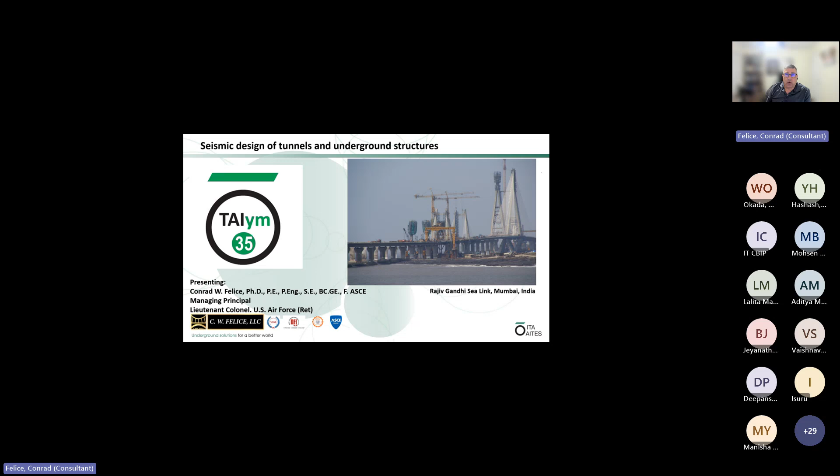We've got some very good folks to give you some background on seismic design. I'll give a basic overview and introduction, and then I'll turn it over to Youssef, who will go into some of the details on the seismic design that we're currently applying. Then we've got a project description where these tools have been applied, and then some risk issues that Mohsen will be presenting, and then we'll be available for questions. My outline is to address some of the worldwide seismicity issues, some of the vulnerabilities, then some specific hazards, and close with some background on our working group.

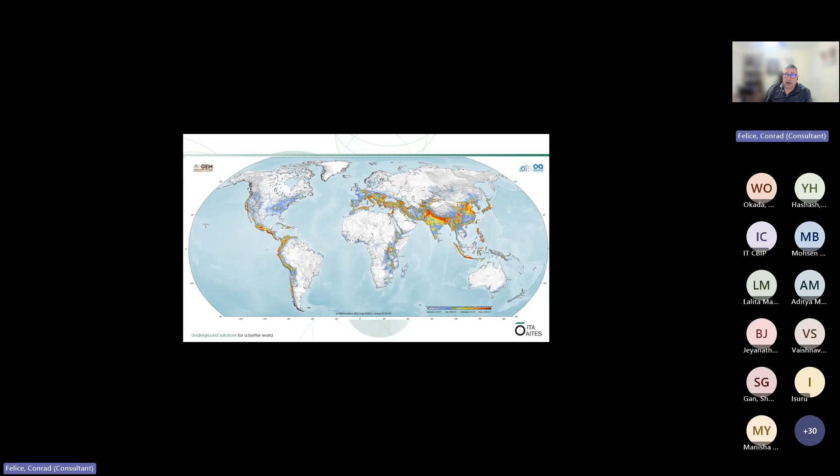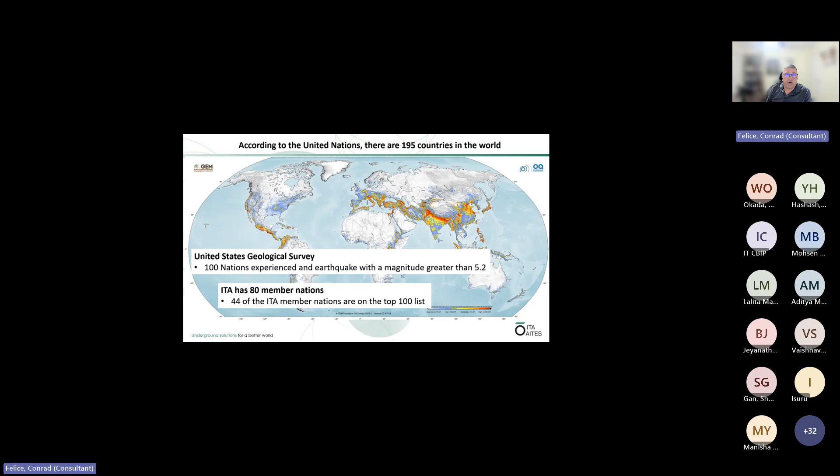The world does have a significant exposure to seismic hazards, in particular the Indian subcontinent, as well as the region where I practice and live, which is the northwest of the United States. So we do have a significant vulnerability, which is why seismic issues are extremely important in our design practice. If you follow the UN, we've got 195 countries, and recently more than 100 have been exposed to earthquakes with magnitudes greater than 5.2. Within our ITA community, 44 of our 80 member nations are on that list of being vulnerable to seismicity.

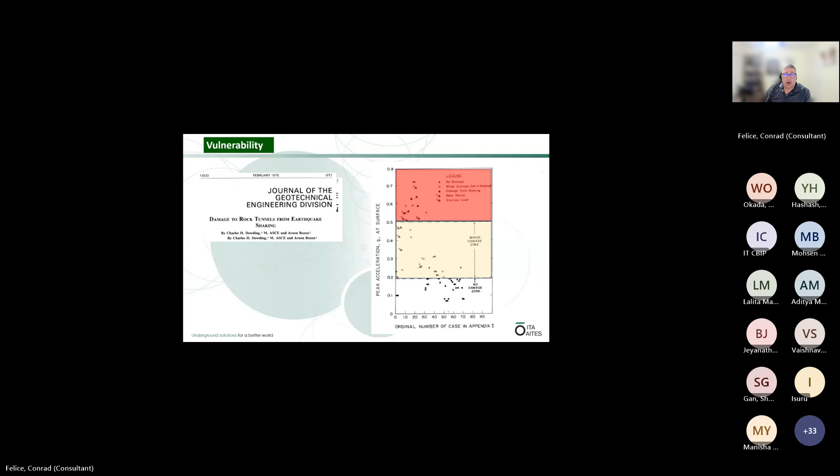There's been some discussion that tunnels are very good places when it comes to seismic effects, and they indeed are. But historical publications and research show we are subjected to significant damage, particularly when ground motions are greater than 0.5 g. It's not only the acceleration values, it's the depth at which our tunnels are located; if they're less than 50 meters, we do have significant damage. It's also the ground type, which the lower graph shows, expressing the vulnerability to our geologic settings and stratigraphy.

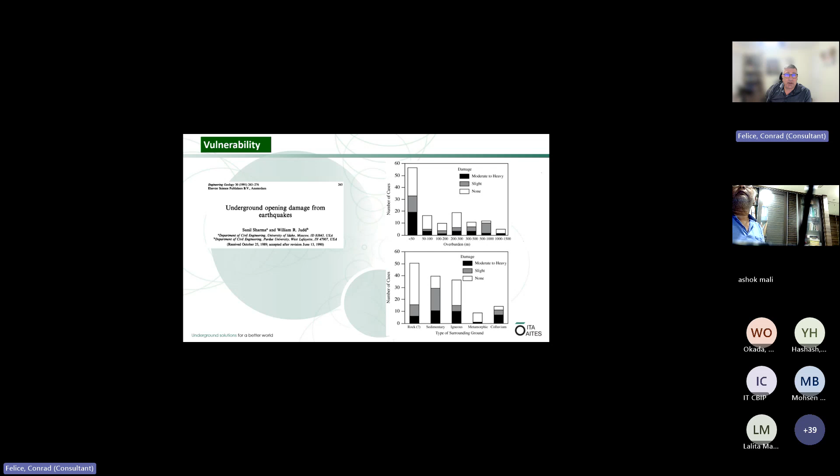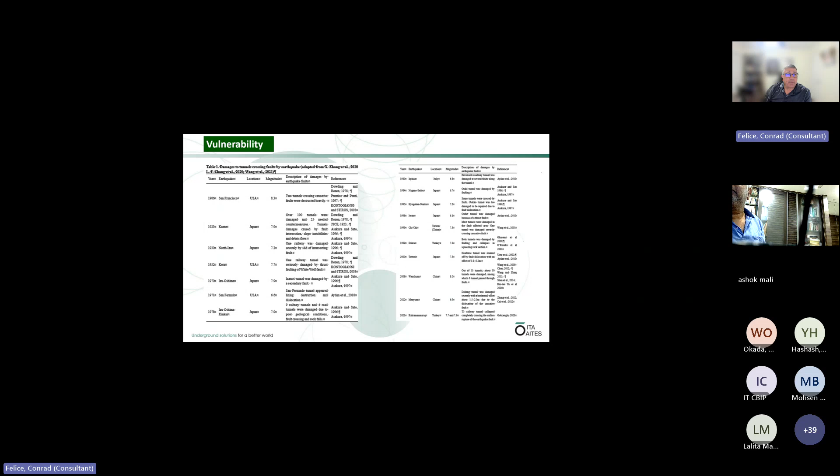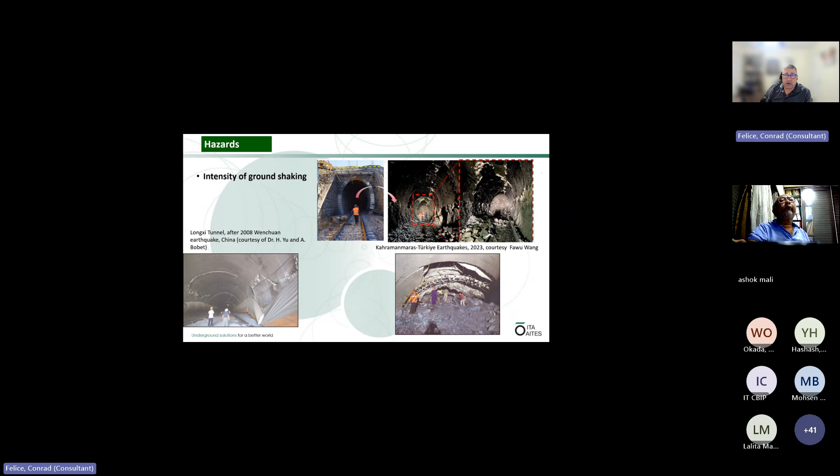We've got a good record in the literature of what the damage has been, what we can expect in terms of acceleration, and the kind of structures exposed historically to earthquakes. In terms of hazards, the first on the list is the intensity of the ground shaking. Whether we're looking at portals or liner systems, there has been demonstrated damage to these structural systems in significant earthquakes.

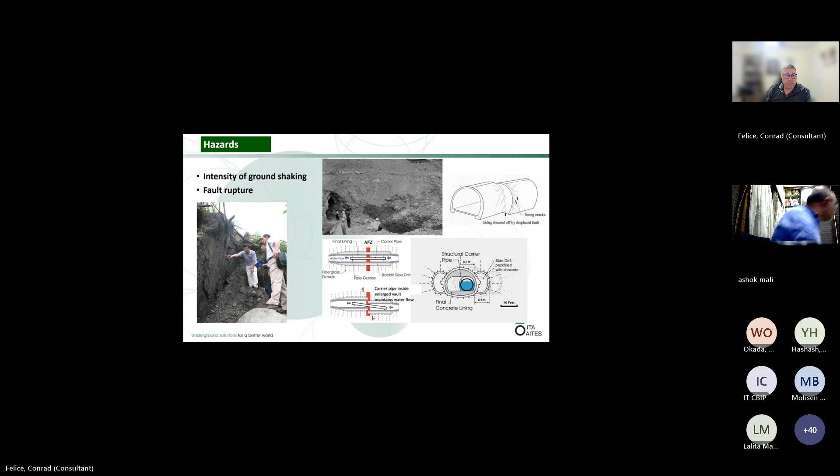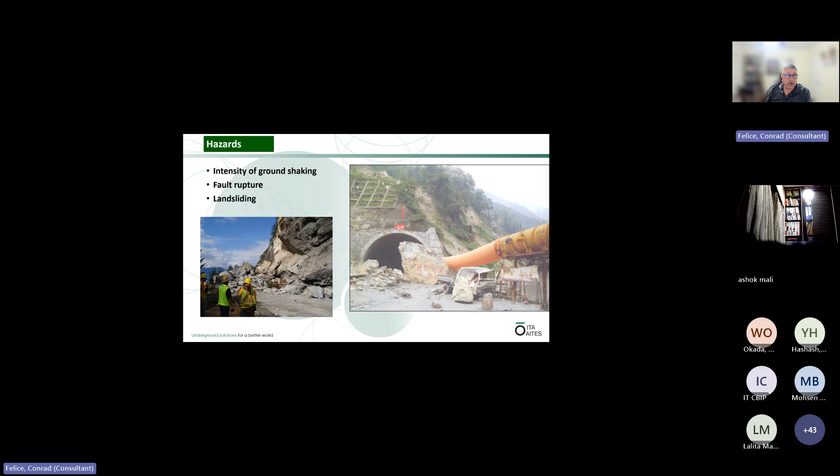We do need to pay close attention to the portals in particular. The tunnel is no longer a functioning, viable system if we can't have access to it. So the fact that landsliding can affect portal structures is also very significant and one we need to pay attention to.

Another issue, particularly for shallow tunnels in softer ground with high groundwater, is liquefaction. The loss of strength due to ground motions and pore pressure development can cause uplift and significant damage to our structures. So we need to address this phenomenon quite carefully in our design practice.

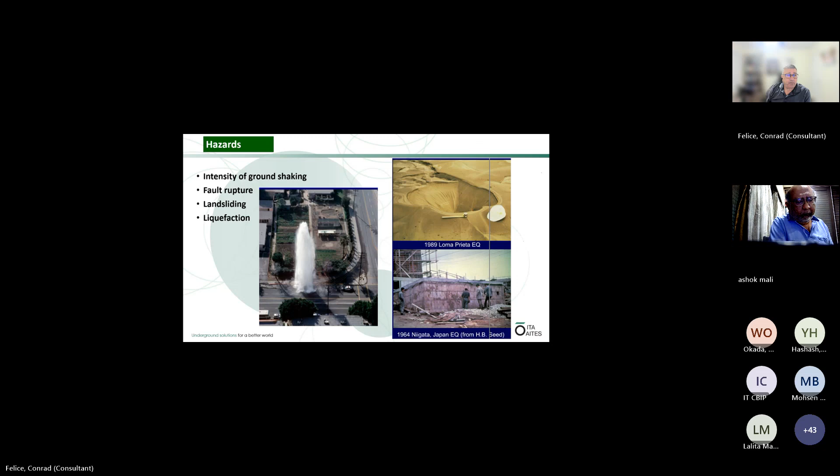Words have been bantered around like sustainability and resiliency, and what you're seeing here is some substantial damage during the Kobe earthquake. These pictures are courtesy of Antonio Bobet at Purdue University, who's worked in Japan extensively. We do need to pay attention to resiliency because putting these structures back in operation and the minimization of downtime is very significant and one we need to pay very particular attention to.

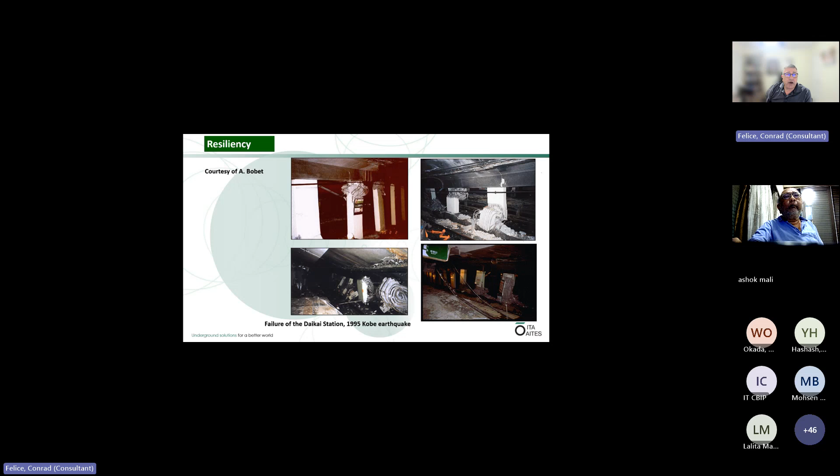We have our meetings in person at the World Tunnel Congresses. We just had one in Stockholm this past year, and next year it will be in Montreal. If you're planning to attend the World Tunnel Congress, I would invite you to attend our working group meeting. With that, I will stop sharing and turn it over to Youssef.

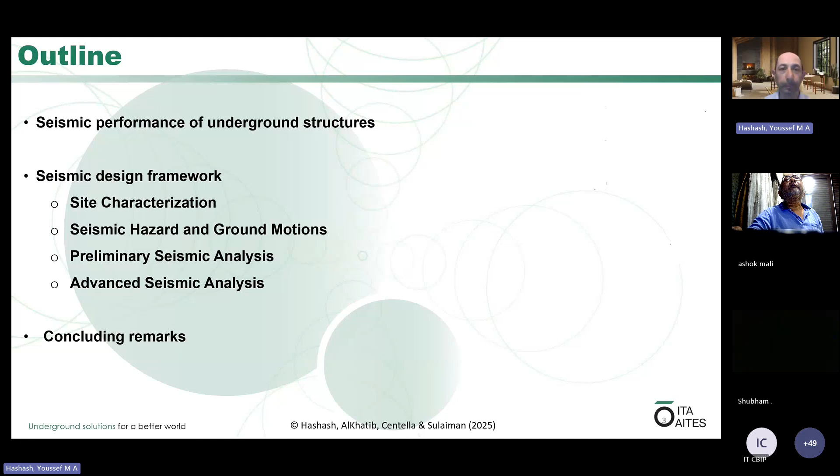So while, as Conrad mentioned, underground structures generally perform well during earthquakes relative to above ground structures, we still have failures. We still have problems with our underground structures. Conrad mentioned Antonio Bobet's photos from Japan. This is a picture of the Daikai subway station that was damaged severely during the 1995 Kobe earthquake.

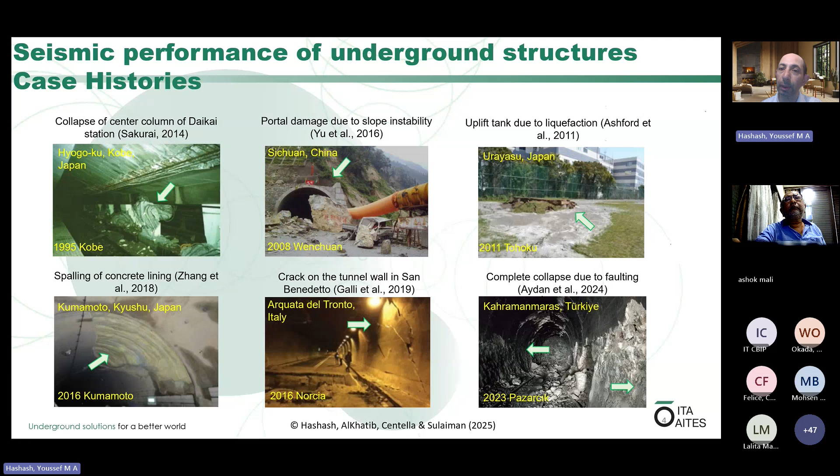This is the portal that was mentioned by Conrad, during the 2008 Wenchuan earthquake in China. You have uplift due to liquefaction; this is in Urayasu, Japan. This is also damage to lining in Japan. In Italy, damage to lining, and this is damage to a tunnel during the recent Turkey earthquake, and the collapses that were observed. So tunnels do experience damage during earthquakes, and hence we want to make sure that we are designing for these tunnels appropriately.

So the types of damage we have span from lining cracking, concrete spalling, water leakage, portal damage, flotation, permanent shear displacement, especially when you're crossing a fault. Another type of shear displacement would be due to a landslide that goes across your tunnel, and then a partial or total collapse of a tunnel. This is a schematic representing, for example, what was observed during the Daikai subway station collapse.

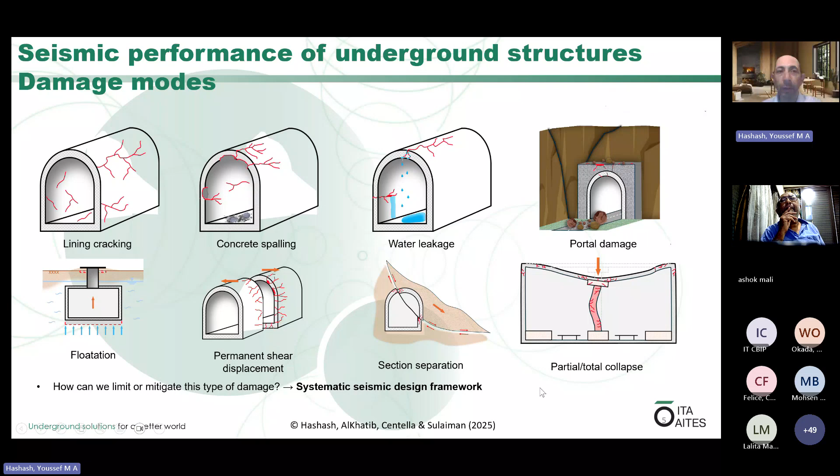So let's go on into our seismic design framework. In our first step, we have to identify our design approach criteria. Sometimes it's code-based, performance-based, or resilience-based. And this has been evolving, especially over the last 25 years since we wrote our 2001 paper. Now, once you establish the framework, the approach, the criteria that you need to meet, then comes our work as engineers.

First thing we do is site characterization. You do everything you usually do for characterization that is needed for a geotechnical project, an underground project, and then we add a few more things that are needed for seismic evaluation. You need field investigation, laboratory testing, and also you need to identify and evaluate faults, some that might cross your alignment and others that might induce ground shaking. Then we go to a second stage whereby we define our controlling seismic parameters.

Whereby we do a systematic seismic and fault hazard analysis. In a systematic approach, sometimes we do that deterministically, other times we do it probabilistically, and they're quite complementary. Then we get to the issue of how we select ground motions representative of the hazard that we are interested in. We talk a little bit about basis of motion selection and spectral matching, and then we talk about site effects, meaning where we usually develop ground motions that are representative of an equivalent rock outcrop, and then we have to look at how the ground modifies these ground motions.

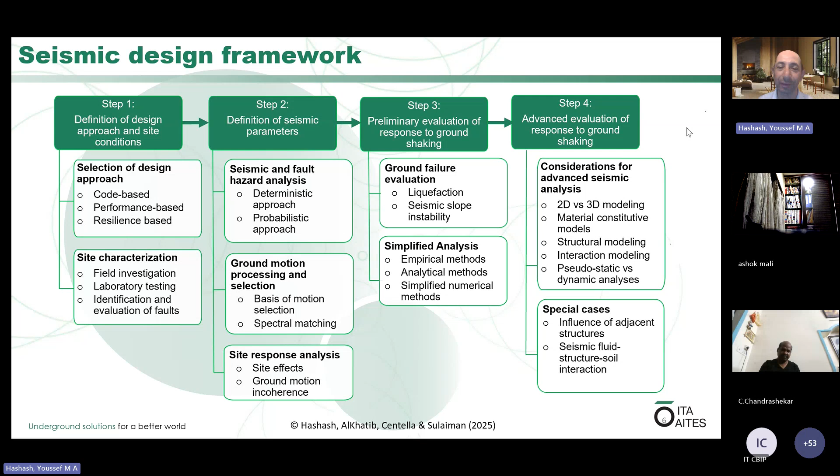So in terms of the code-based approaches, usually it's a standard for many projects, but it may not be site-specific, can be overly conservative or under-conservative, and has limited flexibility. A performance-based type of approach would look at projects that are not covered by design standards. And in fact, many projects do not have the capabilities.

Is there a question? No, Professor. There was someone's mic on. I have switched it off. Okay, I appreciate it. I just want to make sure if there are any questions. Thank you.

The performance-based approach would be to look at, okay, I don't have something for which a design standard exists. And what you will find is that many of our underground structures do not have a specific code that is useful and suitable for them. It sets specific objectives for the performance. It requires advanced expertise, can be time-consuming and costly, but that cost has been going down over the years, especially as you bring in teams that are experienced with this. You may need extensive simulations. Again, the cost of these is going down, and it usually requires an independent peer review process.

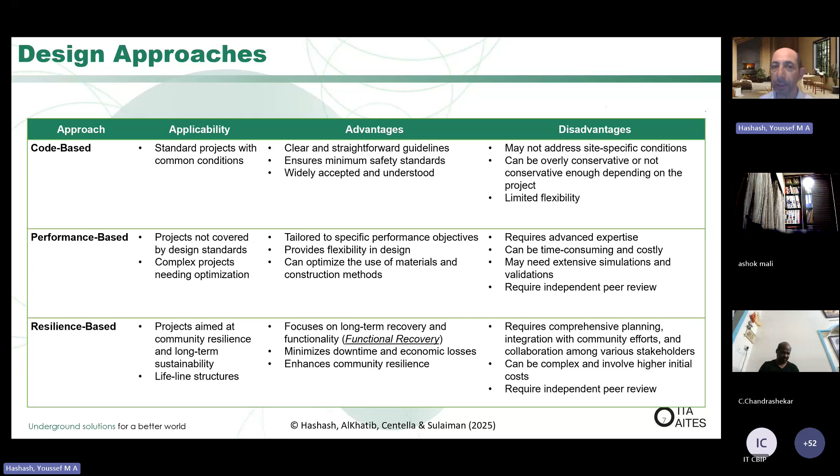Now, in terms of site characterization, I won't spend too much time, but we have a variety of tools and we need all of them for the characterization of our site. We need to find out where our faults are. We need to know the stiffness and strength characteristics of the soil. We need to do laboratory testing. And a key tool that you need is direct characterization of the shear wave velocity profile.

In the US, coming very, very soon, the new codes will not allow for a conversion from SPT to shear wave velocity or strength to shear wave velocity, but they will require a direct measure of shear wave velocity. I'm a big proponent of that because there are so many uncertainties associated with these conversions that people have to do. So the tools that are becoming far more accessible and reliable, downhole seismic testing, CPT, seismic cones, for example, as well as suspension loggers, are some of the best tools. There are surface techniques, but those also require specific expertise in characterizing them because they require inversion.

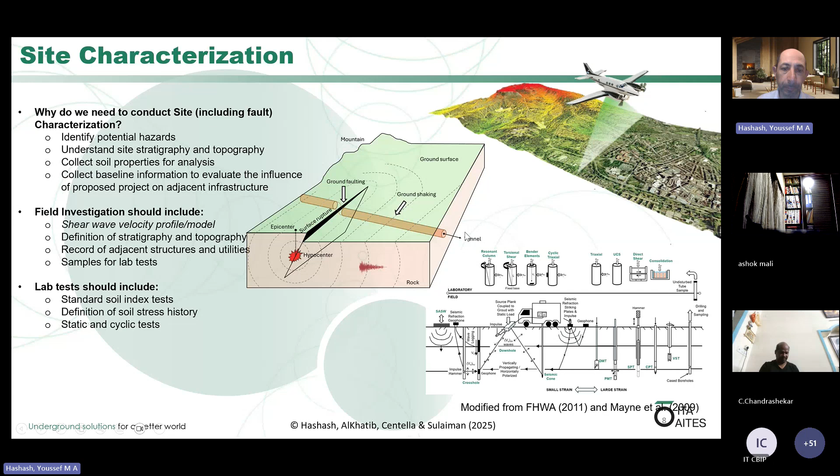Then we get into our seismic hazard analysis. If we think of the deterministic seismic hazard, you have your site, you have your various sources, you evaluate the closest source distance, you take the maximum events that are going to produce the maximum intensity measure you're interested in, which could be peak acceleration, peak spectral acceleration, or any number of factors. And then you say, okay, there it is. I got it. This is what I have to deal with.

It was commonly used in early years, but it's a useful worst case scenario and can be useful for capping a probabilistic approach, because probabilistic approaches that are not constrained by the physics of the problem would cause problems for us.

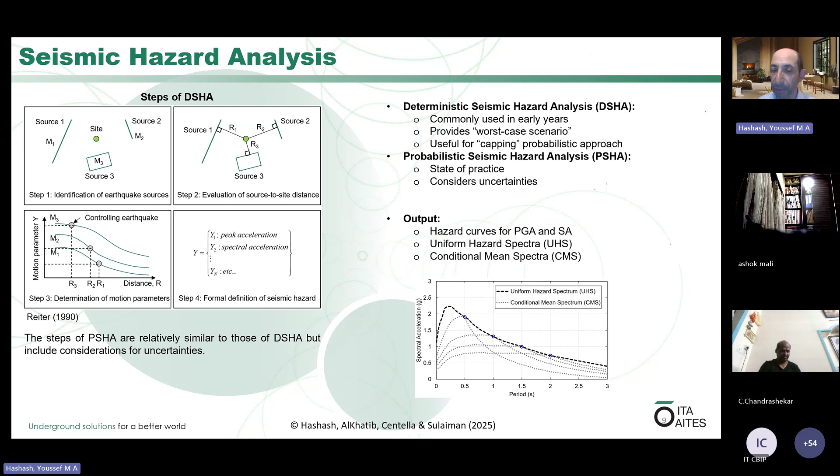Now, a probabilistic seismic hazard analysis follows a very similar approach, but you end up with something like a uniform hazard spectrum. And then there is a tool that will allow us to bridge between deterministic and probabilistic, and that is either a conditional mean spectrum or conditional spectrum, which is incredibly useful and allows for a more refined analysis, because the uniform hazard spectrum, depending on your seismic setting, does not really represent any single source and can be overly conservative. Hence, something like a conditional spectrum is extremely useful. And we've used it on many projects.

Now, for fault displacement, whereby your tunnel is crossing a fault, we now have advanced procedures to develop and evaluate the fault displacement. We really cannot accept that our tunnel goes out of service completely if a fault displaces. We are now able to develop designs whereby you can accommodate displacements and regain function of the tunnel fairly quickly. For example, I am in Los Angeles. You have tunnels crossing faults all the time, and they design them to accommodate these displacements.

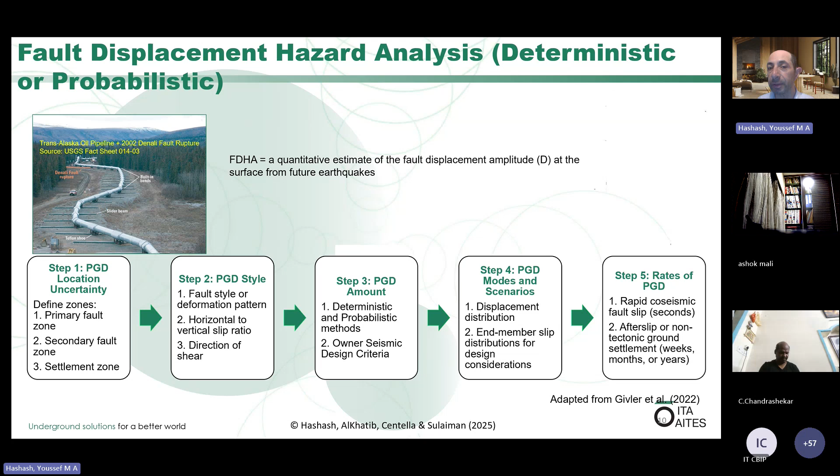And you follow very similar steps to a seismic hazard analysis, but focusing on the fault displacement, and you have both deterministic and probabilistic approaches, and there will always be a lot of opinions about it. There's no single opinion about these, and you try to reconcile a variety of pieces of evidence in developing your estimates of displacements.

Then you have ground motions. So now we're looking at the shaking resulting from nearby faults, and we have to get our ground motion. We have to fit our ground motion to a target spectrum. There are many issues associated with these. I'm not going into these, but I want you to be aware. The tools that we have developed enormously for, say, processing these ground motions. This is a processing tool in DEEPSOIL, which is now RS Seismic by Rocscience.

And you can look at your ground motion. You look at your spectra, both in terms of response spectrum and Fourier spectrum. And by the way, modern seismic hazard analysis is focused more on Fourier spectra, not response spectra, as it gives us a more refined analysis. In the next of the series of seismic hazard development approaches, one of them is NGA West. NGA West 3 is focused extensively on that as well.

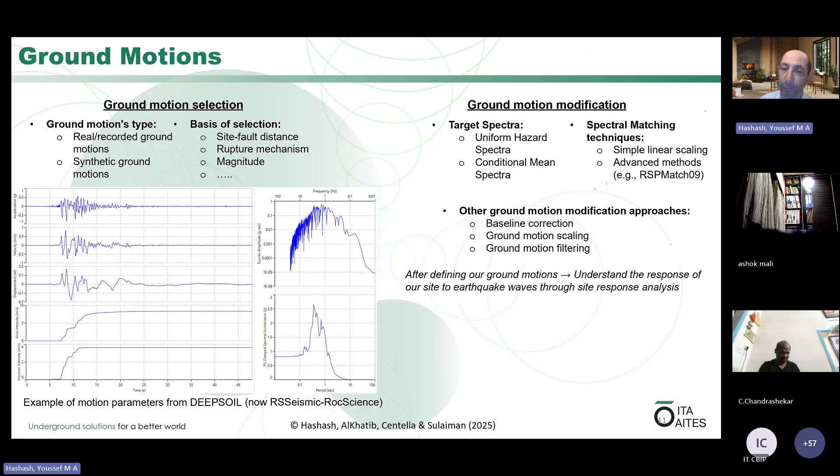Now, in terms of site response analysis, why do we need it? Because the ground itself modifies our ground motions. And since we're dealing with a longitudinal structure, we're not looking at just the ground motion propagating vertically, but also longitudinally, causing incoherence and push and pull on the tunnel lining. We can do it in 1D, and this is with DEEPSOIL, which, as I mentioned, is now RS Seismic. And you also have three-dimensional approaches.

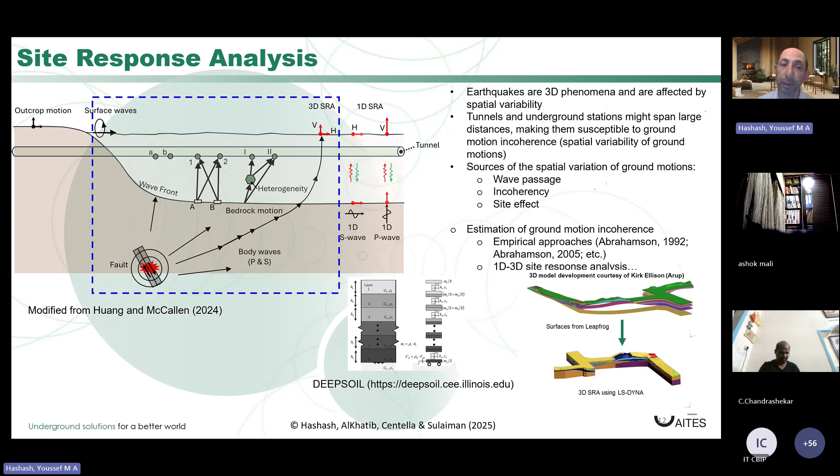This is thanks to Dr. Ellison from Arup, where he uses LS-DYNA to do a 3D site response analysis. My research group is also doing some 3D site response analysis, and you can stay tuned for some publications coming up on this.

Now, in terms of ground failure, we have to look at fault displacements, which we just spoke about. Liquefaction: you have to look at the effect of liquefaction and how that would impact your tunnel. And as I showed you earlier, you may have seismic slope instability. For example, during the Chi-Chi earthquake in Taiwan, a lot of damage to tunnels happened because of slope instability. So you need to understand these impacts as well.

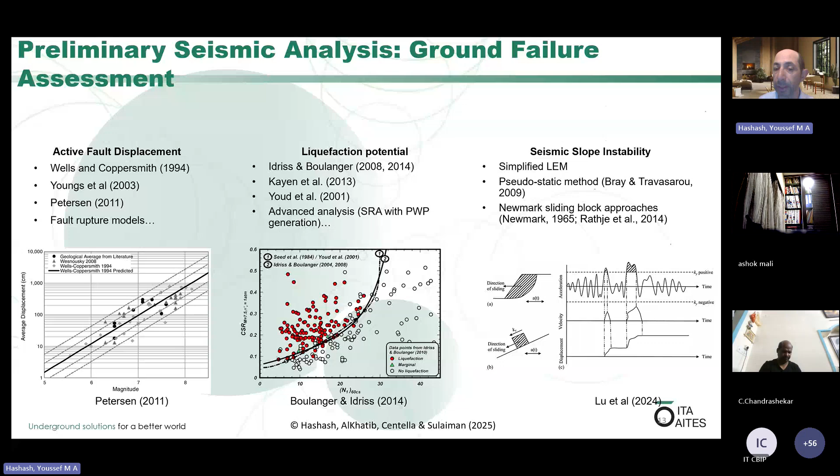Now, let's look at how to evaluate the response of a tunnel to shaking. There are simplified SSI approaches. I always recommend that you start with these, and they would give you an initial estimate of your shaking. You simplify a lot about the ground and about the tunnels themselves. They give you a first order estimate, and you need that to see whether you are going to see a problem and also to decide how to develop advanced analyses. You need to know about the ground behavior.

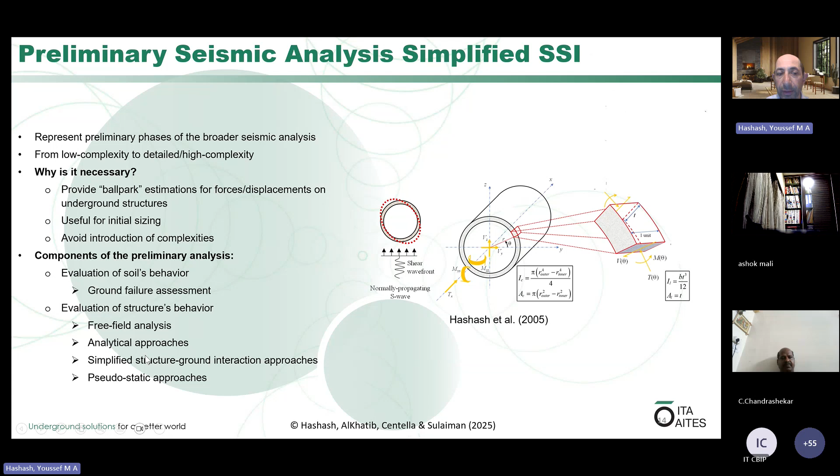You have to do your free field analysis, the analytical approaches, simplified approaches, and pseudostatic approaches. Now, one approach that people know a lot about is the Mononobe-Okabe, or the dynamic earth pressure approach. We have to remember the origin of these.

Goes back over a century ago and is designed for retaining structures that move. Can be used usually for shallow structures whereby the PGA is less than 0.4 g. But once you deal with real structures, you can underestimate or overestimate the earth pressures. And so you don't want to deal with that. You need to be very careful. And some people still rely on it, and I do not recommend it unless there are some very, very good

reasons to do that. Now, there's a free field deformation approach whereby you assume the tunnel moves with the ground, and there is also another solution whereby you assume a perforated ground. But that means that you have to think of it this way, is that the mass you've removed, its equivalent shear stiffness is equal to that of the lining the ground, what you've substituted. It may be okay in some soft ground situations, but in these ones you have large strains, nonlinearity may be

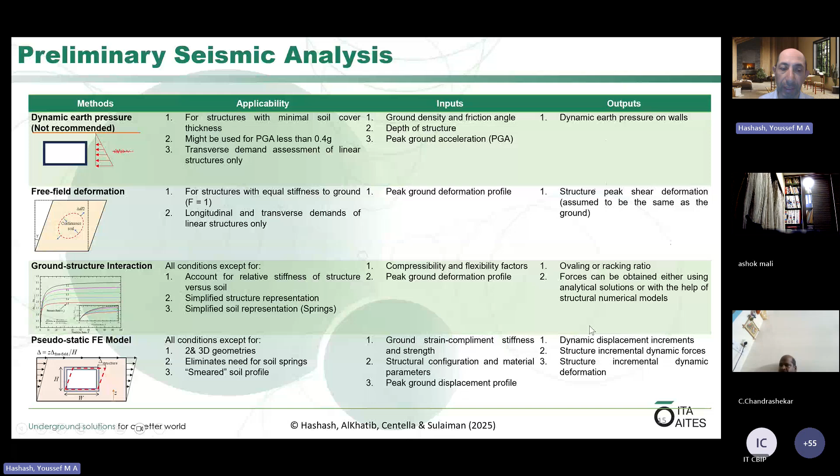In 3D analysis, I have found with my group that currently LS-DYNA gives you some of the fastest calculation times, and so therefore you're able to conduct very complex analyses. We can look at tunnels separately, buildings also separately, but now we can look at the interaction of tunnels and buildings. Why? Because that interaction is important. Or buried reservoirs. We find that the sloshing of water in buried reservoirs is important. And we can then show the shortcomings of the simplified approaches and what you learn from the advanced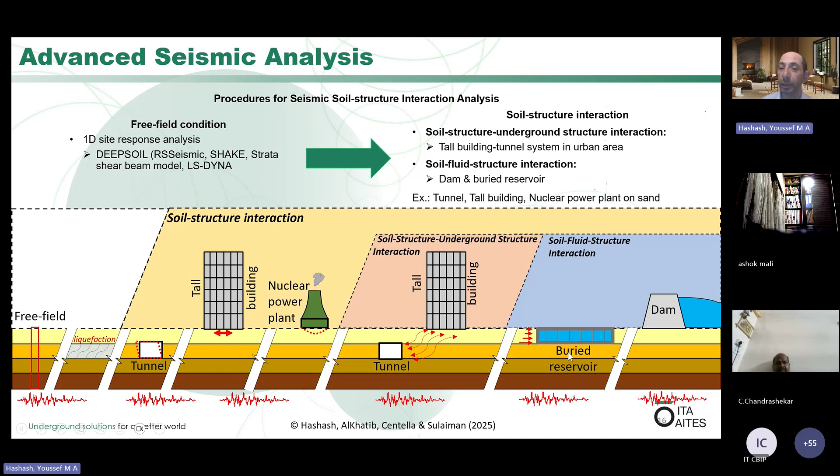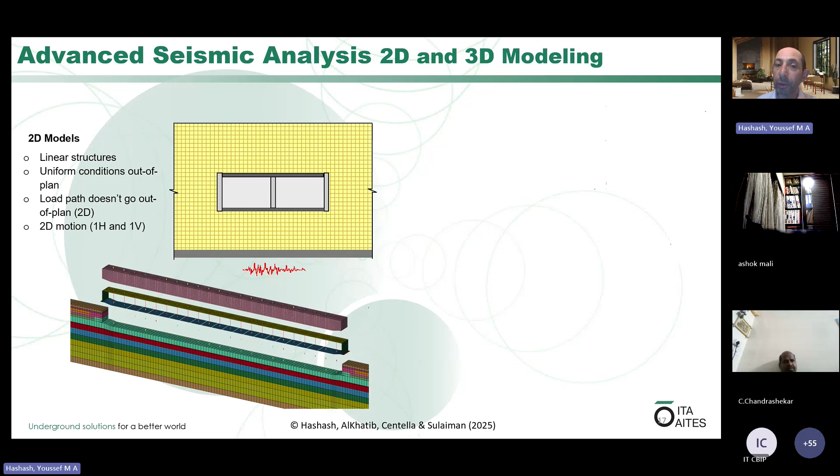approaches. Now, to develop these 2D models and 3D models, that requires advanced expertise and training. And so that is something that is important that your engineers have if this is what you plan to do. And you would have to properly represent the soil behavior with all its hysteretic response, the structure itself, and we have to look at whether you have reinforced concrete, steel, the columns, the connections, the shear development, and all the nuances of the structural detailing can be incorporated in modern models.

And now we can do things whereby I can represent a full building and a tunnel and the interaction between these. So this is something we could not have even contemplated 25 years ago when I published the 2001 paper, but we've published recently papers on these where we can actually represent this. And you can have 3D motions and incorporate the complexity of the underground structures and the tunnels themselves. So this is something we do. And by the way, we're doing it for real projects. This is not just research. This is for real projects.

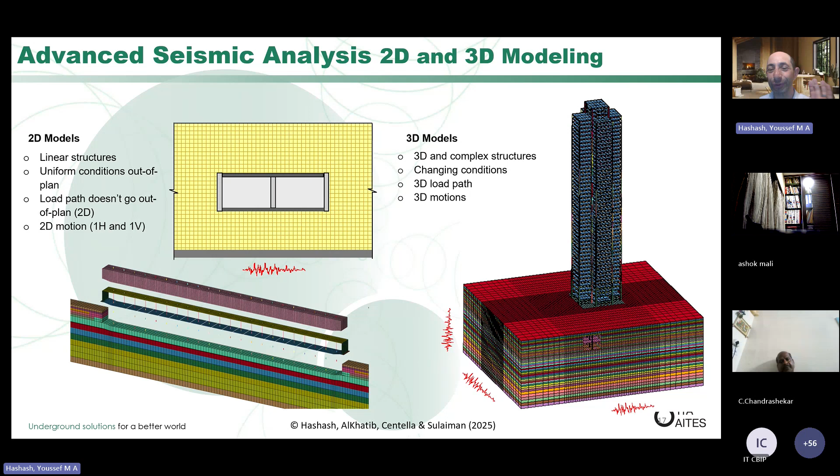As I mentioned, there are a variety of tools that are available for you here for various packages. Whatever package you use, you need to be very careful about the modeling and do some checking. You can always check the results versus closed form solutions versus analytical approximations, and then, of course, extend it beyond that. And you have to have the elements, the structural elements, the material models, the soil structure interface. That's very important, especially if you're looking at force transmissions.

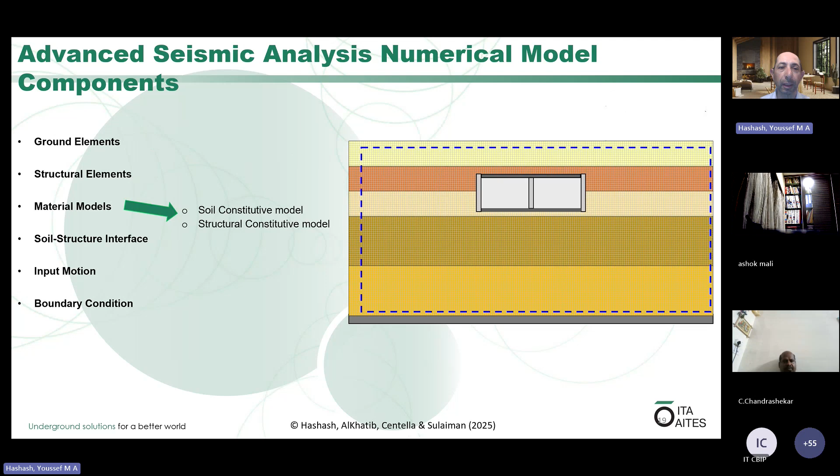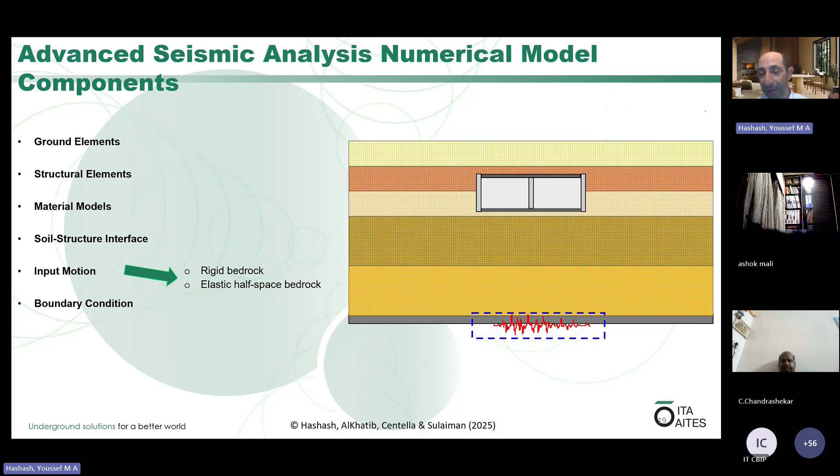So you're here dealing with mesh density, the representation, the material constitutive behavior, the interface, and the interface condition is very important. The base conditions, is it rigid, elastic half space? And if you want to know more about that, you need to look at RS Seismic/DEEPSOIL for that, and then the boundary conditions for that.

The pseudostatic approach is useful, and we needed it at a time whereby dynamic analyses whereby we fully trace the nonlinearity were rather expensive. And so this is an analysis we have done in 2010, whereby we looked at the effect of different boxes. And we did two types of analyses. One is pseudostatic analyses. These are the open symbols. And then we did dynamic analysis to show the difference between a true dynamic response and the pseudostatic approximation.

And you can see that, for the racking ratio, for example, for a double box, you are going to underestimate the racking ratio. For a single box in a stiff soil, you are going to potentially slightly overestimate. Now, here in this range, where you have soft soils, you can be underestimating or overestimating relative to

the dynamic analysis. And here we also looked at the impact of temporary walls and whether we ignore them, which is often the case, or we fully represent them. And we found that not representing them can actually underestimate the demand on the final structures. So it's not always, shall we say, conservative to ignore temporary structures.

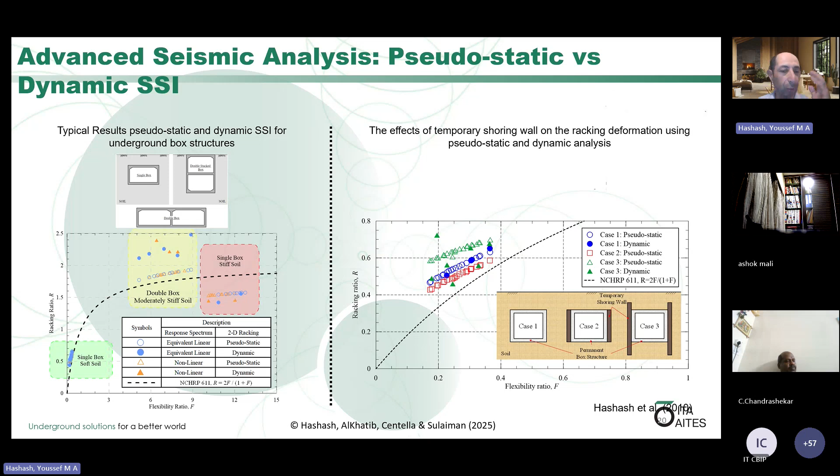What all the work we have done says is that for your specific structure, you do want to do site-specific dynamic soil-structure interaction analysis, because you do not really know whether you're overestimating or underestimating it. And again, nowadays, this has become more accessible.

So now I'm going to give you an example of a series of projects that we have conducted to look at the effect, in this particular case, of tall buildings on underground structures. So this is the problem we have. This is a tall building, during construction and also as part of the permanent structure. Now, we know that a building will have a base shear. That base shear doesn't stop at the property boundary. It has to go somewhere.

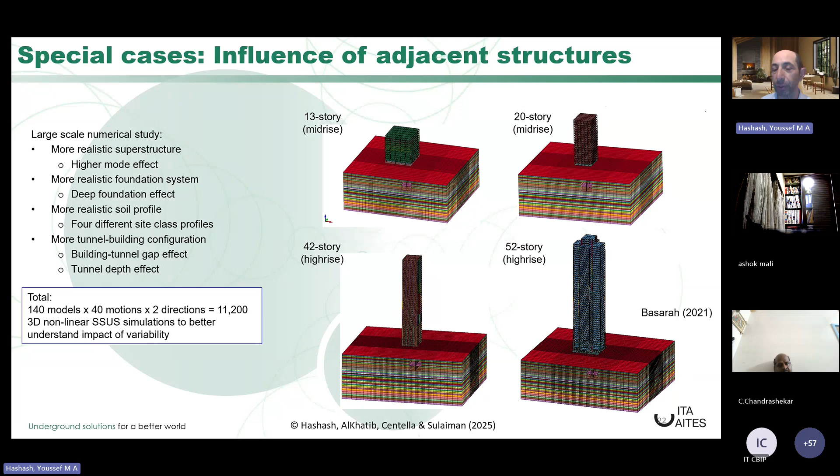And therefore, if you have a very nearby subway tunnel, that load is going to go into your subway tunnels. And so we conducted a systematic study as part of PhD work, inspired by a real-world problem, using multiple buildings of different heights. We looked at 2- and 3-dimensional ground motions, and we started looking at the impact of a variety of factors, for example, the depth of the foundations and the relative location to a tunnel.

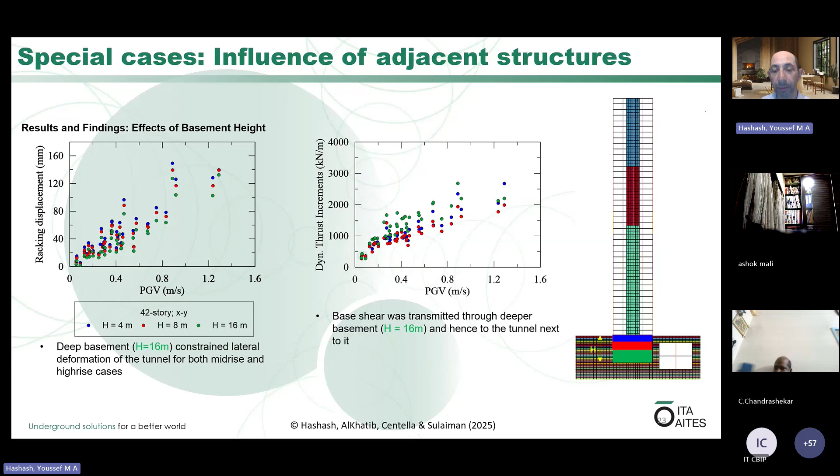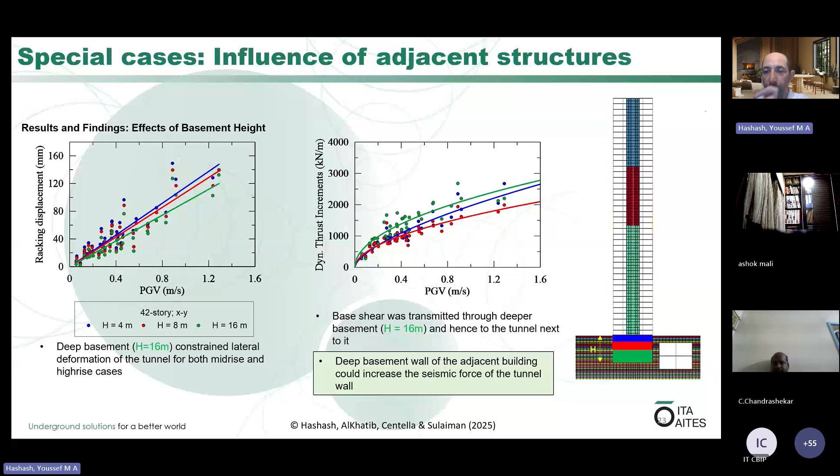Now, when you look at all of these factors, you find the racking displacement changes depend on them, and hence you do want to represent them. The dynamic thrust is impacted by the intensity of the ground motion and by the structure you are dealing with. So there are all these variables in place. We did try to fit some curves to them, but there's really no substitute for conducting simulations specific to your project. Because also, don't forget that the building footprint is limited while the tunnel is a longitudinal structure.

So this is a summary of some of the key behaviors we've observed. We looked at ground motion parameters, number of stories, height of basement, pile length, tunnel depth, tunnel-building distance, and VS30 soil stiffness. We found, for example, PGV, peak ground velocity, has a strong correlation. For pile length, there's limited change, but with tunnel depth there's an increase in racking displacement, and dynamic thrust is increased for mid-rise and decreased for high-rise buildings. It all depends on the rigidity of the foundation and the depth of those foundations.

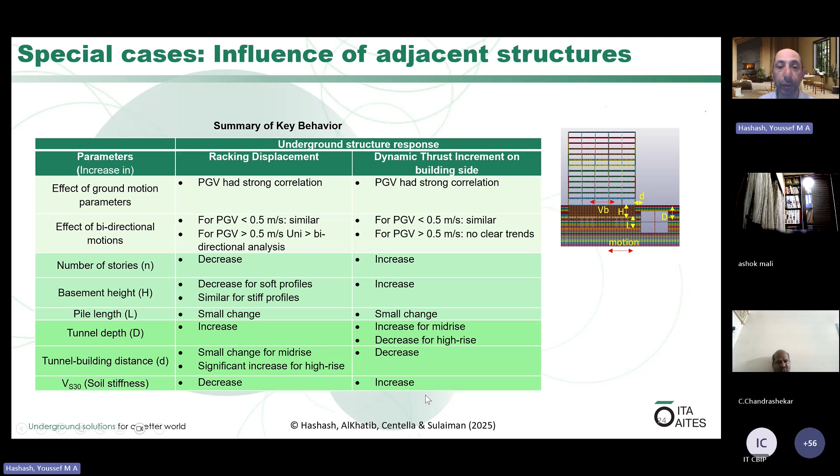So here's another example where we conducted a 3-dimensional analysis of a buried structure. Let me explain these buried reservoirs: think of them as having the shape of a pizza box, with a lot of columns to support the roof, and they are buried underground. Then you cover them with soil, often to protect the water, but also to reclaim the surface for, say, community sports facilities. Up till recently, people have simulated these as 2-dimensional. Have they experienced damage? Yes, they have. For example, the Balboa Reservoir in the 1971 San Fernando earthquake.

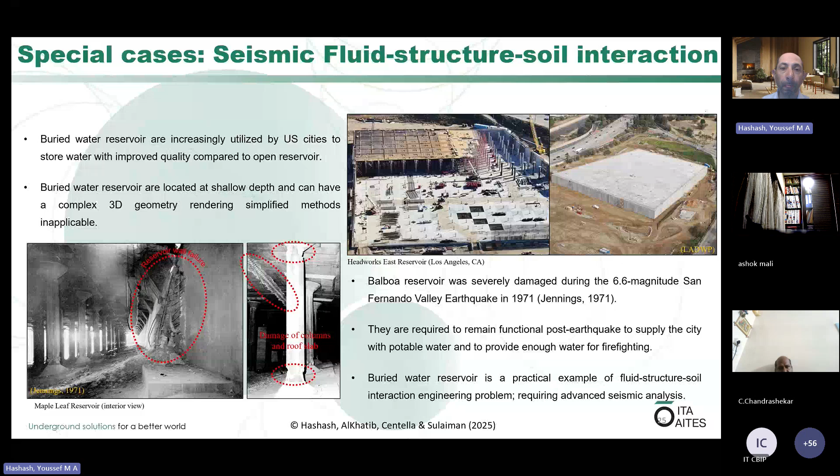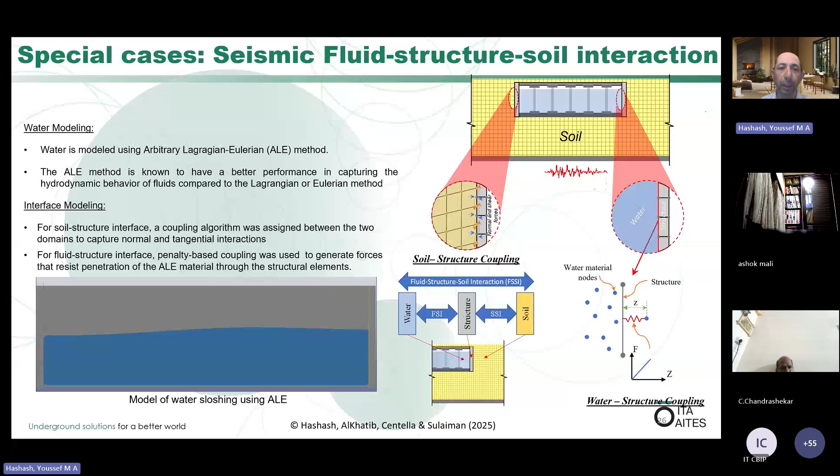So these reservoirs have water in them. And we know that during an earthquake, water can slosh. That will apply dynamic pressures on the sides. But also, if the water is too high, it can hit the roof, and that could cause damage to the roof. So we need to represent it. Here you're looking at it in 2D. So we now have to have water, structure, and soil interaction, looking at all of those together. And we were inspired by some underground reservoirs in Seattle and in Los Angeles.

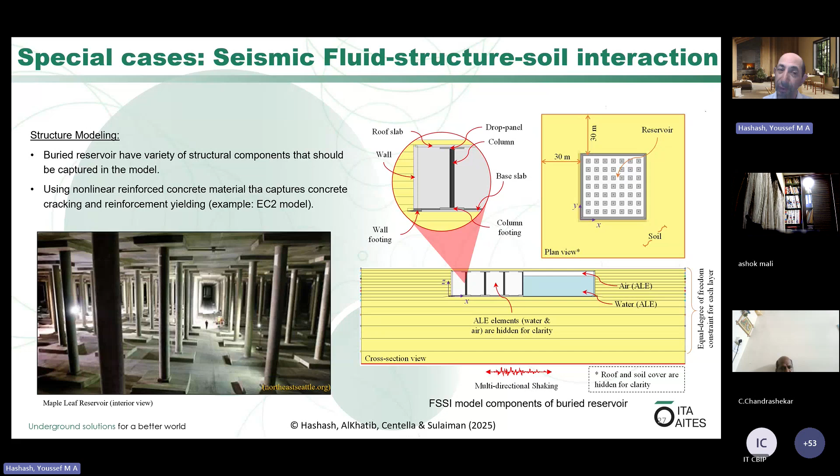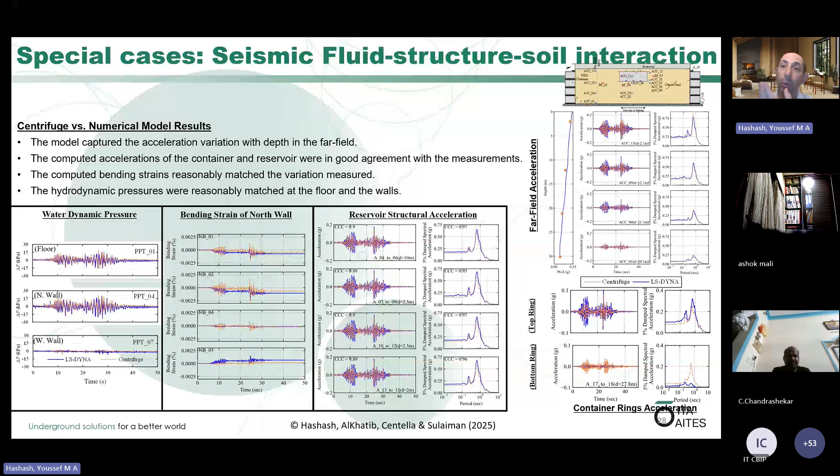We developed a series of centrifuge tests that we conducted at UC Davis to develop experimental data on these, and these were heavily instrumented. Then we calibrated our models with these centrifuge experiments, and then we conducted our simulations. We could not fail these reservoirs in the centrifuge because we were afraid of causing damage and having pieces fly around when the centrifuge is spinning.

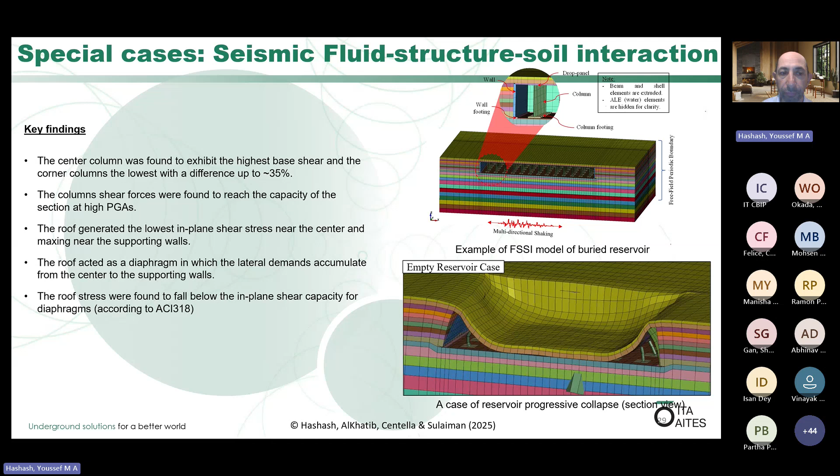We have a diaphragm effect. So it's not a pure underground structure where we talk about pure displacements, but it is actually a true soil-structure interaction, whereby the inertia of the roof also plays a role in the performance of this very shallow underground structure. Okay, now that takes me to my concluding remarks.

The possibility of damage or collapse of tunnels can be reduced by considering a systematic seismic design framework. Seismic design objectives, including functional recovery considerations, need to be defined. Representation of the seismic hazard is needed in order to perform a successful seismic design.

Simplified approaches to analyze the seismic response of underground structures provide good first approximations, but are limited by the simplifying assumptions. Advanced analyses are now with us. This is our time. And they can help us tackle these and better represent structures. And I'm happy to also talk to you about the role of Gen AI in this space as well.

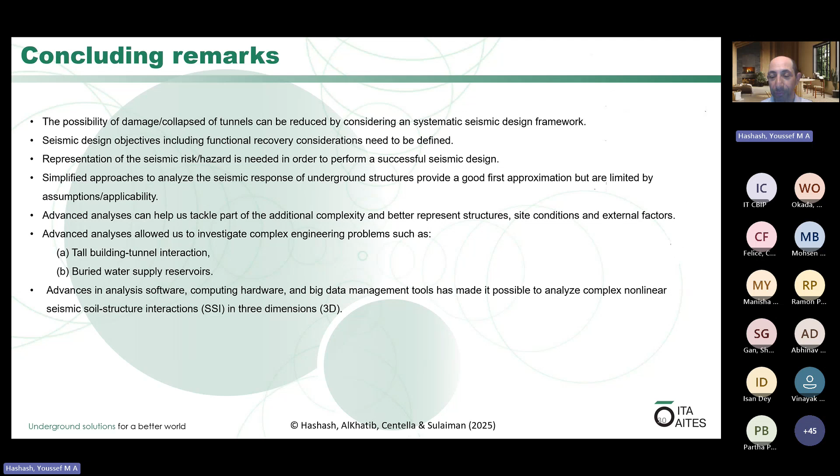I showed you examples of the importance of soil-structure interaction, tall buildings, reservoirs. We have advanced analysis through software, computing hardware, data management tools, and generative AI, by the way, that can help us with these nowadays. And so we're able to do these. And with that, I think I am done. These are some useful papers and books on the topic.

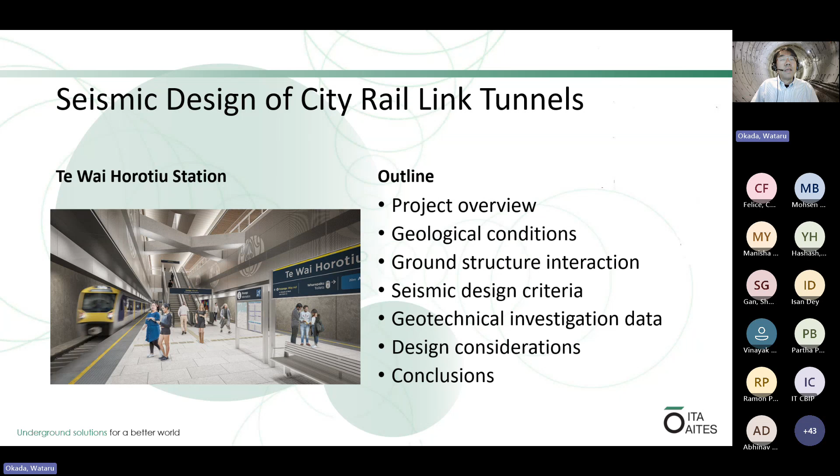Here we go. So my name is Wataru Okada. I'm also a member of ITA Working Group 9. Today I'm going to present a case study of the seismic design of the CRL tunnel. CRL, short for City Rail Link, is a recent project we completed in New Zealand. I'm going to start by talking briefly about the project overview, followed by some key aspects of the seismic design of the rail tunnel for the project.

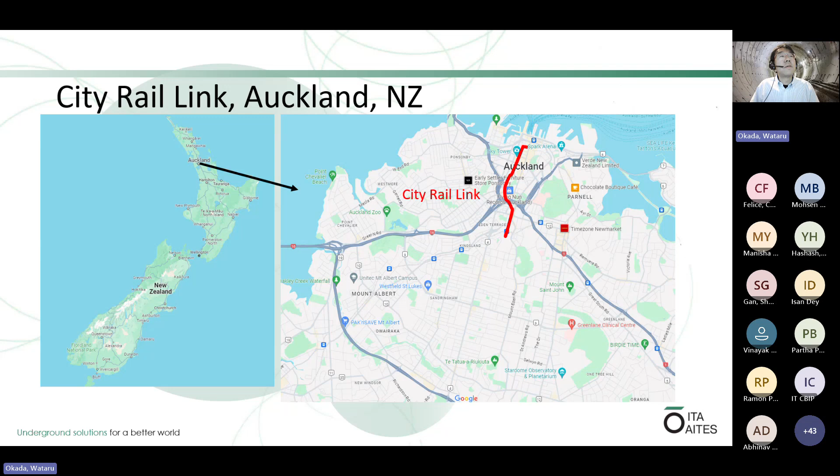The project is located in Auckland, which is in the North Island. It's the largest city in New Zealand, and it's a new underground rail scheme which connects the CBD to an existing rail line on the city fringe. It's practically complete. We're just in the testing and commissioning phase, so the project is expected to open sometime next year. Right. Okay.

So in terms of the scope of tunneling work, the biggest component is obviously the running tunnel. It's a 1.7 kilometer twin tube, internal diameter 6.24, and we also have two new stations shown in green, and we are redeveloping two existing stations as well. In the middle of the scheme, we have a new station. It's 30 meters deep, in hard rock. So instead of conventional open-cut construction, we decided to do a mined platform tunnel station.

And at the southern end of the scheme, we have mined caverns instead of TBM tunnel. And in between the two running tunnels, we have 4 cross passages connecting the running tunnels.

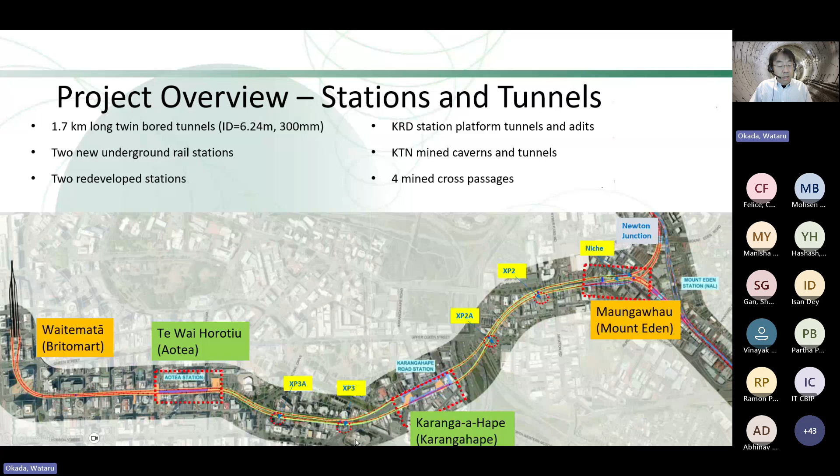Now, the project is being delivered by Link Alliance under an Alliance procurement model. So we share profits and risks in a pain-gain sharing model. In the Alliance, we have 3 international contractors and 3 design firms. And of course, we have City Rail Link as the owner participant. We work closely with 2 sponsor organizations who are the ultimate asset owners.

Right. So let's look at each tunnel component. The biggest, longest one is the running tunnel. They are bored tunnels constructed using a TBM and lined with a precast segmental lining. As I mentioned, 6.24 diameter. There are 3 types of precast segments. Type A1, which is roughly 80 to 90% of the tunnel, is steel fiber reinforced, and the remaining 20% is conventional reinforced concrete with steel cage reinforcement.

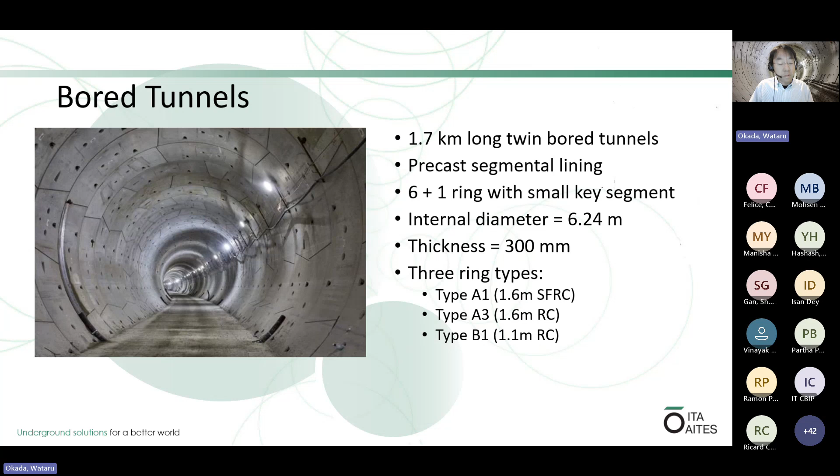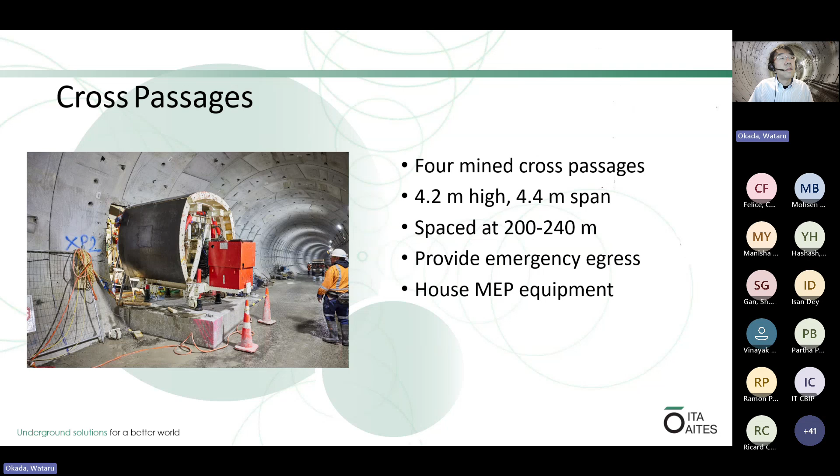We have mined cross passages at 4 locations. They are spaced at 200 and 240 meters based on the fire life safety assessment. They provide emergency egress in the event of a tunnel fire. And they also house mechanical and electrical equipment such as deluge valves and communication cabinets and so forth.

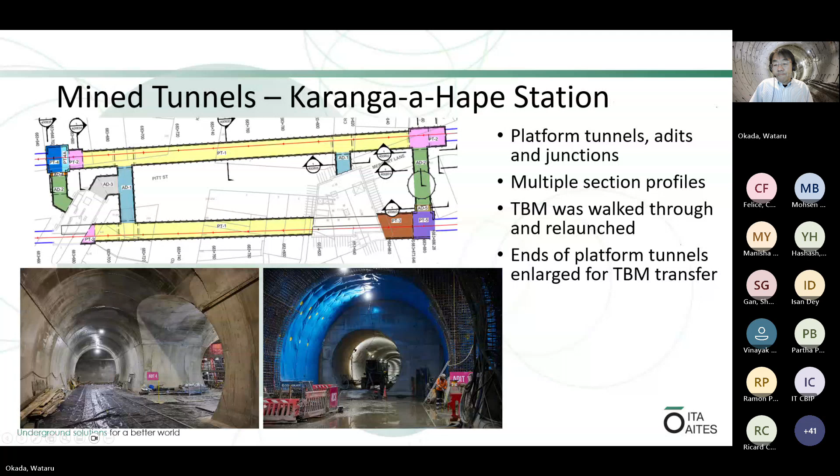As I mentioned earlier on, we have a mined tunnel station at Karanga-a-Hape. So what happened is this one platform was constructed before the TBM completed the first half of the scheme, and the tunnel breaks in, and the tunnel just walks through, and it's relaunched out the other end and completes the second half of the scheme. And same goes for the downline as well. And it was constructed using road headers.

Now we have tapered caverns, mined caverns constructed using road header. Again, the reason we have mined caverns at this southern end of the scheme is because we have rail bifurcation, where one track splits into 2 tracks. So we need a larger section to accommodate the Y junction. So the largest cavern is called MC 2050, and its largest span is 17 meters and 11 meters high.

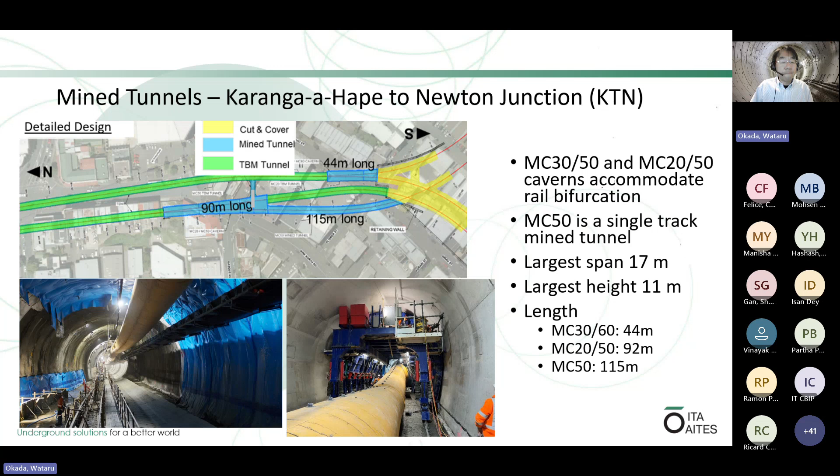Now, for all the tunnels, the seismic design philosophy is essentially the same, if you're wondering. And just in terms of site characterization, we did a program of site investigation and came up with this geological interpretation. So the tunnel alignment is predominantly in orange material. It's called East Coast Bays Formation Sandstone and Siltstone.

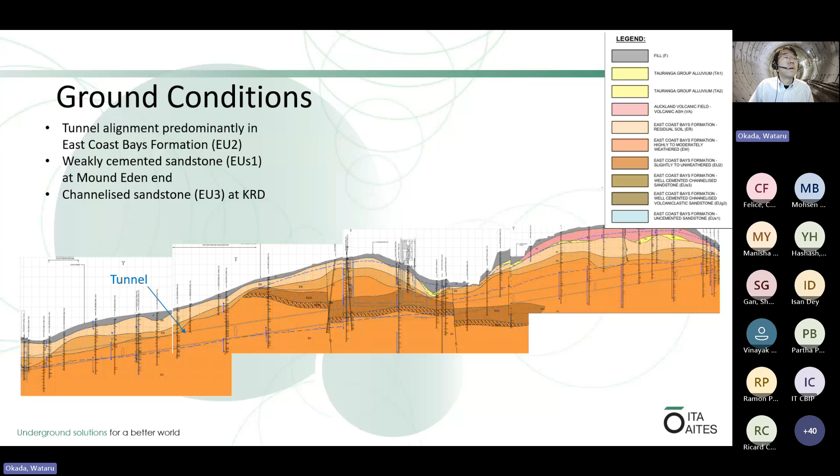We call it EU2, and we have localized lenses and pockets of weakly cemented sandstone at the southern end, and in the K Road Karanga-a-Hape station, we have moderately stronger sandstone. We call it EU3. So this is a quick summary of the geological units we find for the CRL project.

So the most predominant material, EU2, is basically interbedded sandstone and siltstone, and its UCS is typically in the 1 to 5 MPa range, so it's considered weak rock, so that has implications on the soil structure interaction as well. At least in New Zealand and Australia as well, I guess.

So existing seismic codes are kind of geared towards surface structures, such as bridges and buildings and the like. So they are not quite adequate for underground structures. The key thing to bear in mind is that underground structures are restrained by the surrounding medium, so they are not like above-ground structures that are governed by inertial effects.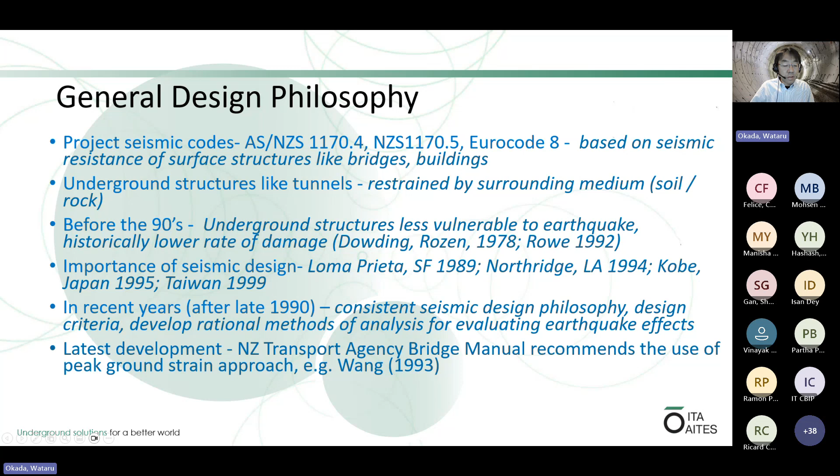So in the New Zealand scene, we had a recent development where the New Zealand Transport Agency included a peak ground strain approach, such as Wang 1993, as a recommended approach for underground structure design. Now, whereas surface structures are predominantly based on a force-based approach, for underground structures on our project, we adopted a deformation-based approach.

So as I mentioned early on, the seismic response of an underground structure is dominated by the ground response rather than its inertial properties, like period and mass and frequency and so forth of the structure itself. So we need to determine the free field deformation and also the seismic parameters as well. And once the soil structure interaction and seismic effects are worked out, they are added to other sustained loads, and we look at each load case to check the structural capacity of the tunnel.

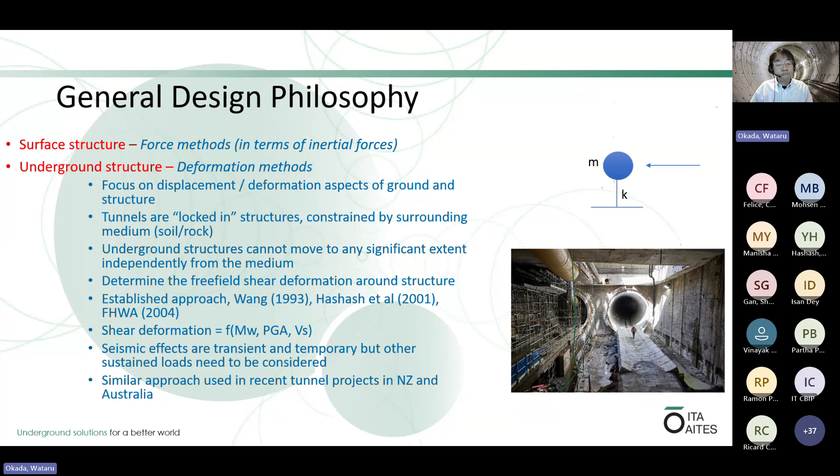Okay, so Professor Hashash covered this in very good detail, so I'm not going to go into detail other than to say we started off with a simplistic closed form approach, and that gave us preliminary results, and that gave us structural actions and all sorts.

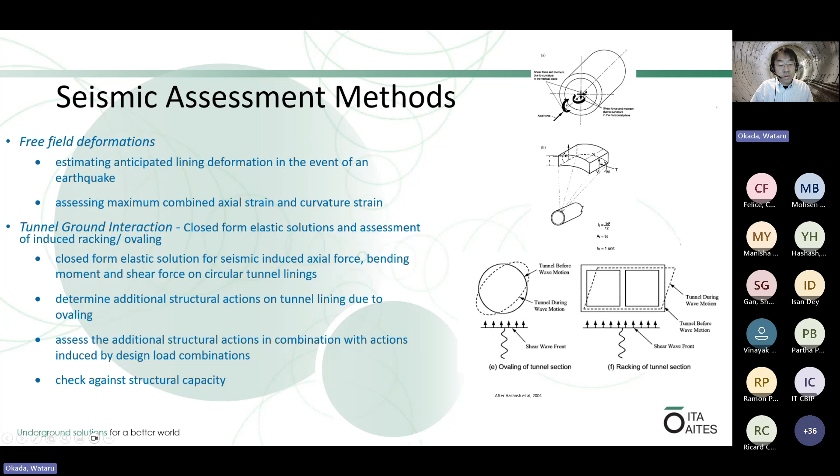Right, and just in terms of our seismic design criteria and parameters, we need to design for a 100-year design life. That's what the client requested. And we considered two different earthquake scenarios. So for the ODE, the tunnel needs to maintain continued operation. So the trains need to basically keep running. Whereas the maximum design earthquake scenario, MDE, is more focused around public safety and preventing loss of life.

Now, another important aspect for seismic design criteria is we need to look at the criticality of the tunnel in terms of economic loss, life occupancy, and post-disaster emergency functions and all that.

So taking all that into account, we came up with importance level of 3. And taking all that into account, we designed for 1 in 2,500 year event for MDE and 25-year event for the ODE case. And we have 2 different site classes, but mostly in class B, which is in rock condition.

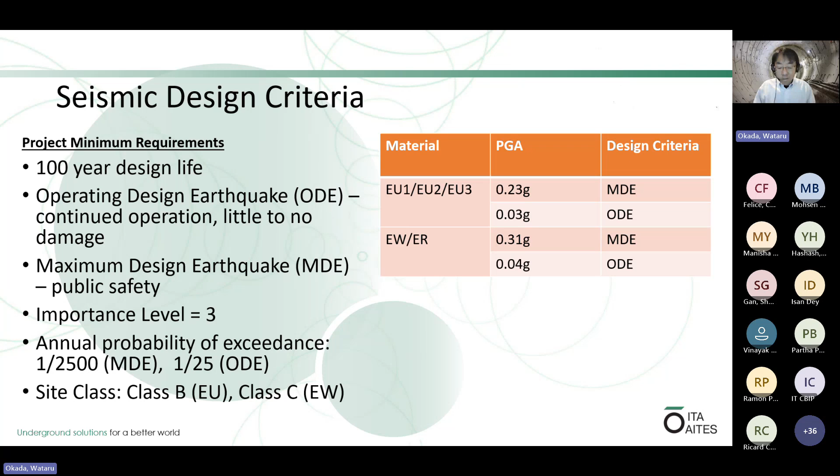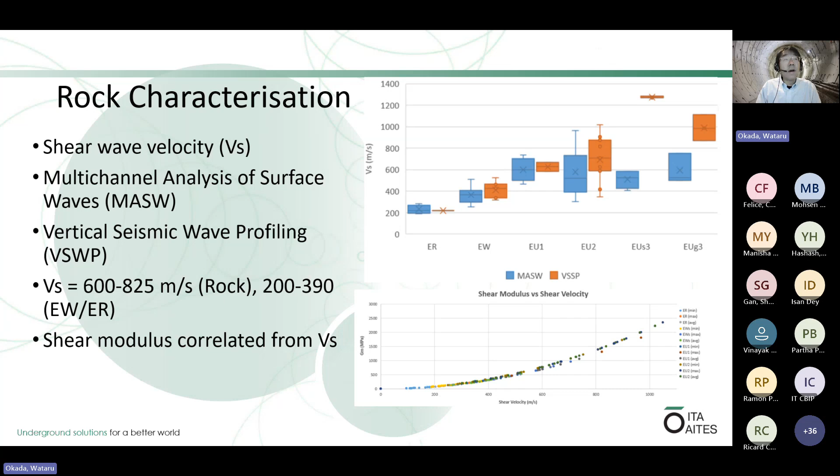Now, site characterization. So we invested in geophysics testing, and so we did MASW as well as VSWP. So we had direct measurement of shear wave velocity as opposed to sort of a correlation using other types of testing. So direct field measurement is always preferred than sort of conversion, as Professor Hashash mentioned early on. And so from that, we obtained shear wave velocity and used it for our seismic design.

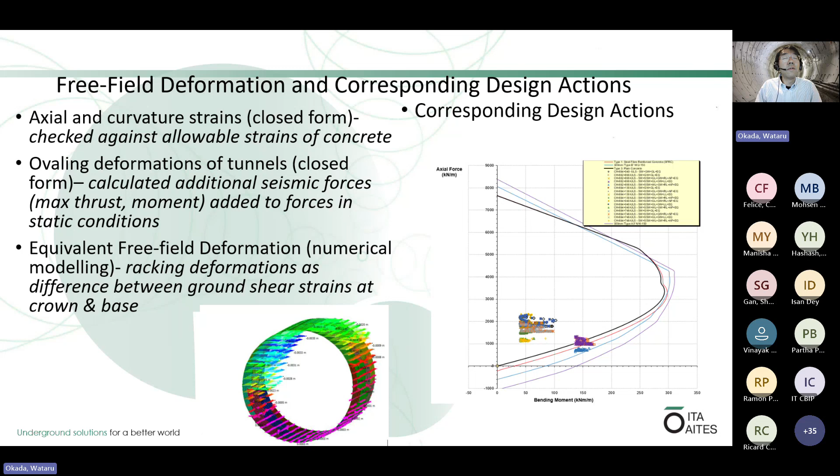There are a few other considerations, I guess. So 1.7 kilometer scheme, we did the design analysis at 16 locations, and we looked at the range of ground conditions, rock cover, overburden, and in some places we have critical surface structure. So it's important to cover the whole range of ground conditions and overburden, etc. Sensitivity analyses are quite important given the uncertain nature of input parameters like characterization and of course seismic response, etc.

Another thing we need to bear in mind is more like a construction aspect as well. Whether it's TBM or mined tunnel. In TBM, like a bored tunnel, for example, TBM always overcuts. And you build a segmental lining inside the shield. So you always end up with a little bit of annular void around the tunnel. So you have to grout it, and every now and then you somehow end up with a void in grout. So it's important we identify those voids and do secondary grouting.

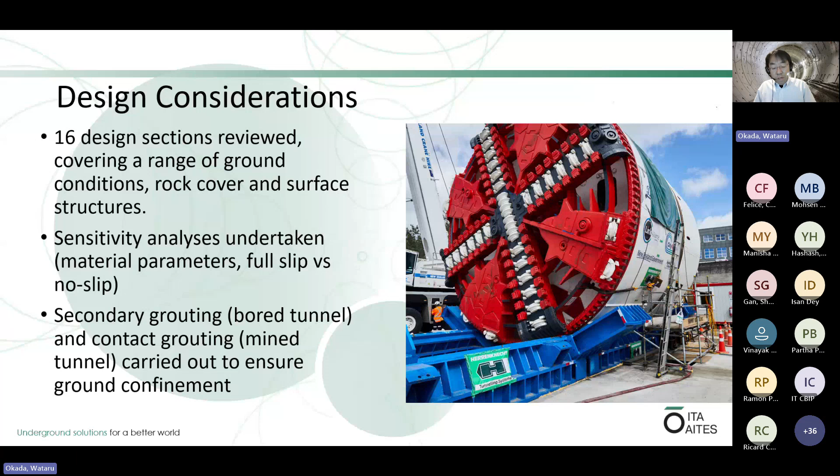And likewise for mined tunnel, you cast in situ, for example, and you have to check there's no void by doing what we call contact grouting, so that tunnel structures are actually restrained and act like a locked-in structure. So that it actually behaves like we expect in a seismic event.

So in conclusion, soil structure interaction is a key aspect in tunnel seismic behavior. We adopted a design based on deformation, and I can't emphasize this enough: good investigation data go a long way to characterize the site and also the response characteristic of the ground. Sensitivity analyses are always required to design for uncertainty. So that's the end of my presentation.

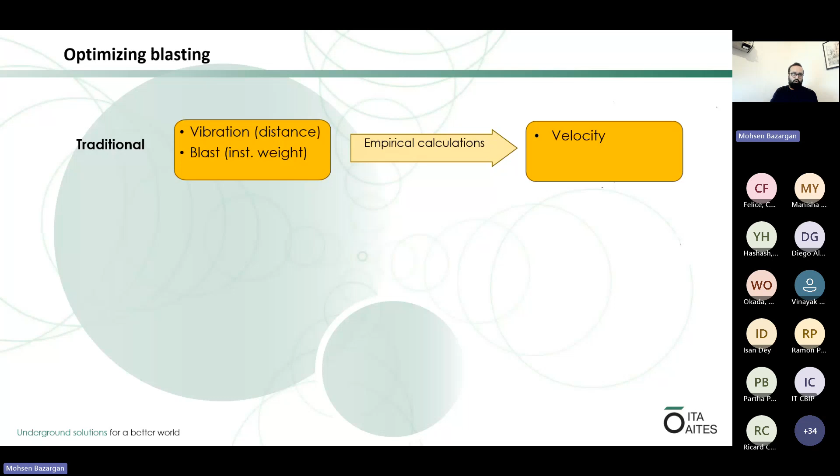This site specification data is usually very complicated, and we try to use an AI generative app. I'm not going to use the advertisement part for this presentation, so I'm just going to give you the scientific background of that. We are using the pre-collected vibration and microseismicity data from the former and ongoing project to feed it into our AI generative system in order to calculate and formalize a generative equation that can give us the vibration and the microseismicity in a certain location.

What does it mean? I'm going to use tunneling data in Stockholm from 2000 or 2001 until 2005. And now if there is going to be a new infrastructure building pretty close to a hospital, and they would like to do some blasting to clean up the soil and reach into the fresh rock, I'm going to use those data from the tunneling part to design how much TNT and explosive material you're going to use, which type of design you have to use, and eventually how much vibration and microseismicity you are going to induce at a certain distance from your project, which means how much you're going to affect my hospital or a sports center that is pretty close to your project.

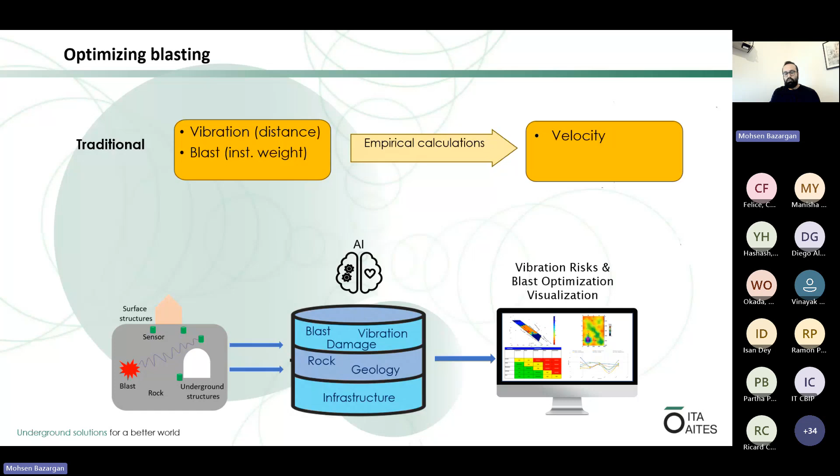So I'm just going to show you one slide. If you can see my cursor, basically we are going to define that this would be the blast area. And then we are going to show that based on the distance from the blast area, you do have certain important infrastructure pretty close to the blast area, some not, some very important but far away. And then we are showing you how much vibration that infrastructure is going to receive based on the certain amount of explosive material and a certain design of the explosion that you have decided for your project.

These are just fruitful thoughts. This type of equation and this type of calculation is not very nonlinear, so it's pretty linear. And everybody who's listening to this presentation with a little bit of Python coding would be able to create their own small app to calculate the vibration at a certain distance from the location of the blasting. This is good for the design of the project before you start the project and apply for permits.

And also when you are doing the same project, follow my thoughts: imagine that you started the project, you're in the middle of the tunneling and you're going to do the blast and drill tunneling, and then you have receivers at a certain point where I'm moving my cursor. They are your vibrometers. So by doing this operation continuously, you would be able to cross-correlate the data you get from the analytical calculation and AI-fed information with your data collected in the field. So you would be able to correct your data on the way, and then you will have better and better accuracy.